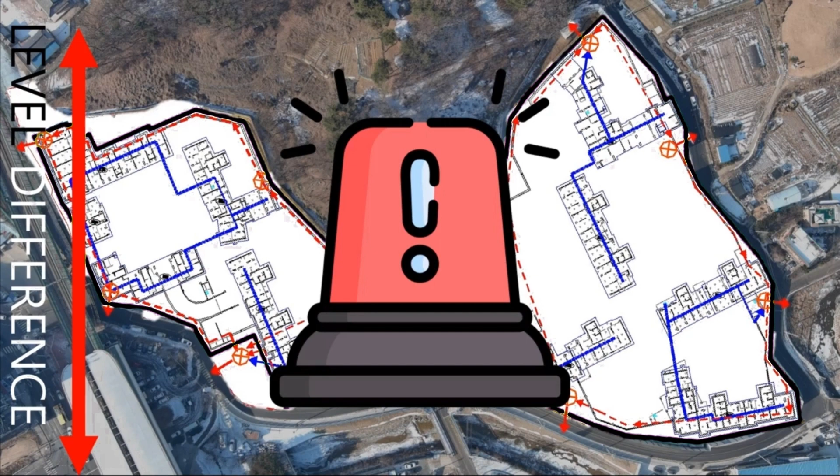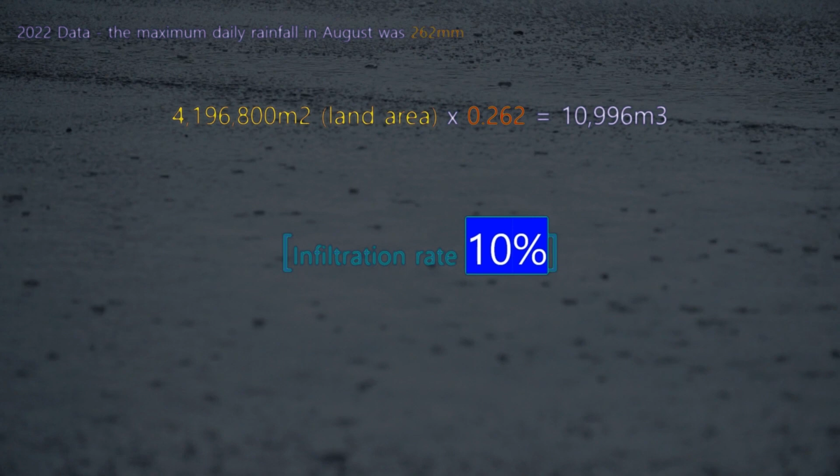To prevent this from happening, Hanyang Construction planned the rainwater treatment based on the maximum daily rainfall amount in Namyangju City, where our site is located. Based on last year's data, the maximum daily rainfall in August was 262 mm. For our site, the rainfall amount would be 10,996, which is the maximum daily rainfall in August multiplied with our land area, 4,196,800. The infiltration rate was estimated at around 10% based on the geological characteristics of the entire site, which means we need to handle approximately 9,896 of water per day.

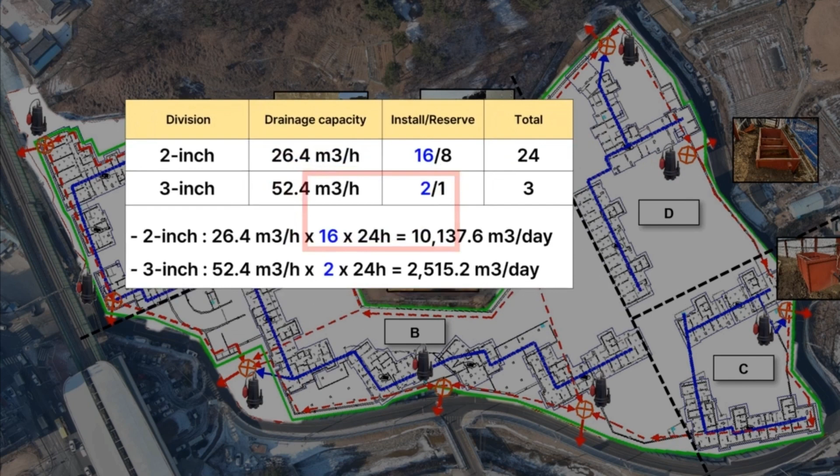To handle the excess water, Hanyang Construction installed 16 units of 2-inch pumps and 2 units of 3-inch pumps in each section. The 2-inch pumps can process 26.4 per hour of water, while the 3-inch pumps can process 52.4 per hour. Therefore, the daily processing capacity is 10,137 per day for the 2-inch pumps and 2,515 per day for the 3-inch pumps, totaling 12,650 per day. This means that the site can handle the excess water without any issues.

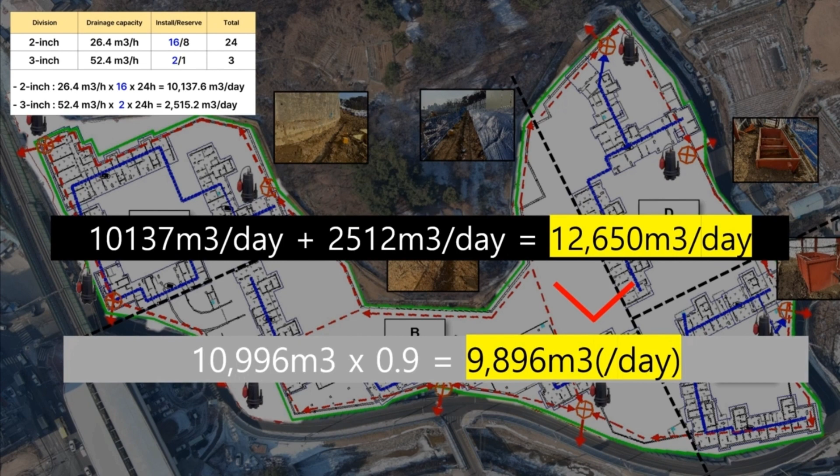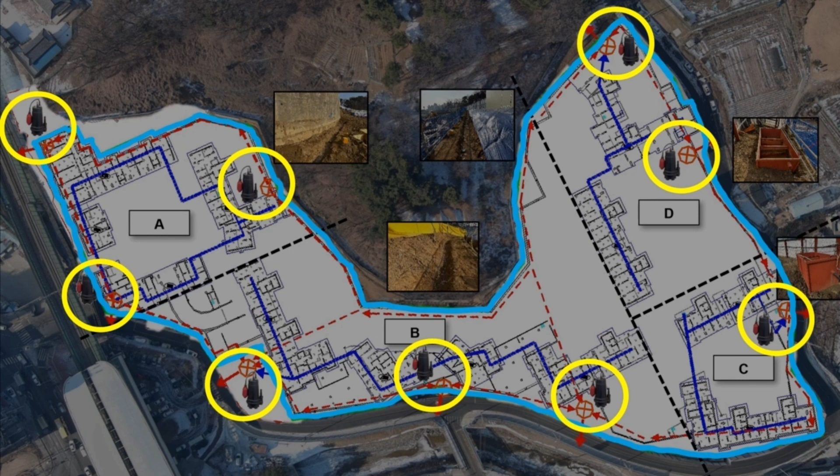In addition, we have installed drainage systems along the site boundary roads, including Sanmaru, and have prepared for the disposal of excess water by connecting 9 temporary grit chambers to the external drainage pipes of the road construction company in advance. This part has already been completed for water treatment on our site. Moving forward, we need to figure out how to handle the additional issues where excess water may occur during construction.

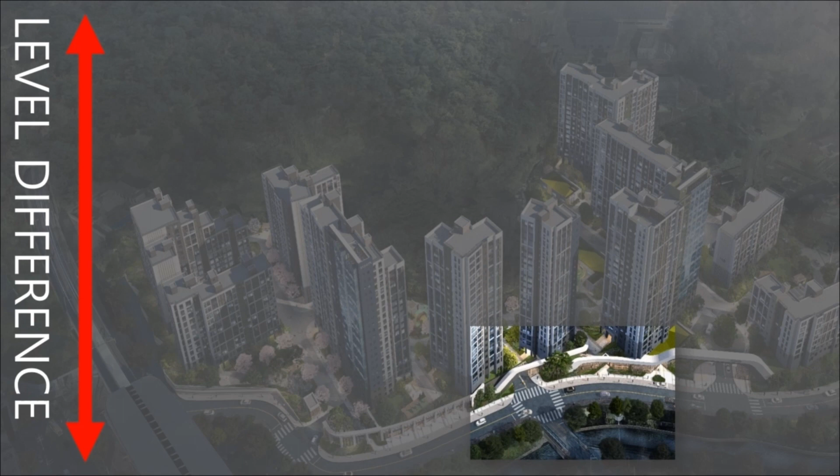Firstly, Hanyang Sujain Riverine is situated on a sloping terrain. As a result, there is a greater risk of rainwater flowing into the front of the first floor shops than in other areas. The initial design plan did not include measures to prevent rainwater from entering the front of the shops. Therefore, there was a risk of rainwater infiltrating the shops if the nearby river overflowed during heavy rain.

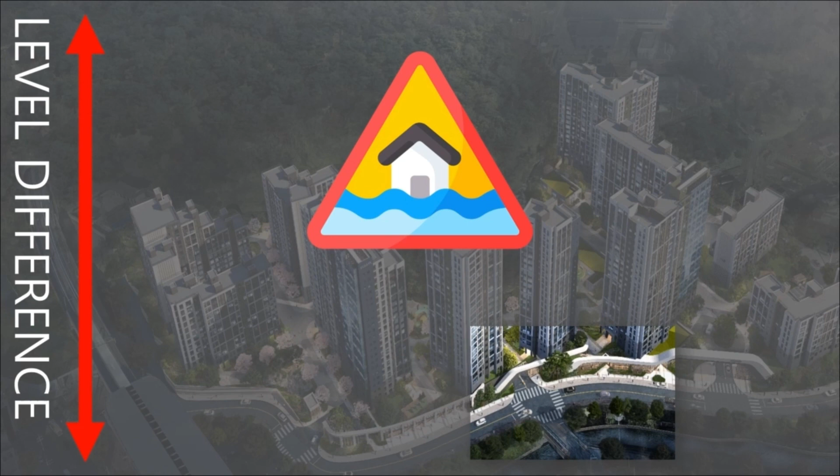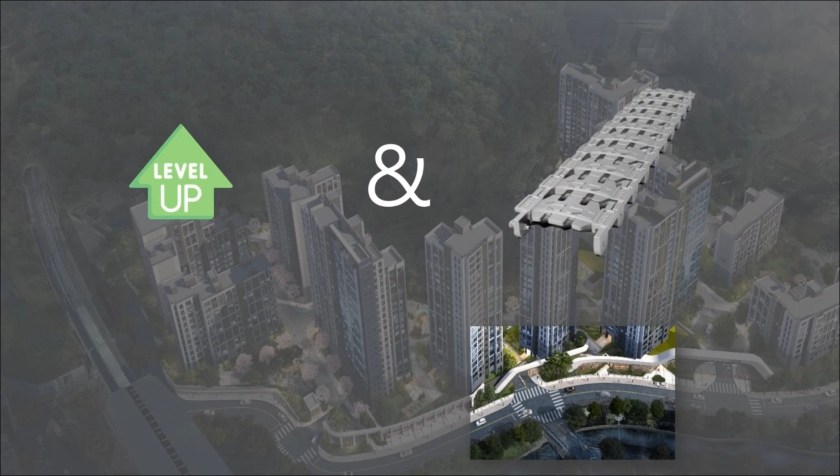To solve this issue, we modified the design by raising the level of the shop floors and creating a slight slope towards the road, preventing rainwater from entering. Additionally, we added a trench to serve as a pathway for rainwater to be discharged at the entrance of the shops. Moving on to the underground parking lot, as mentioned earlier, there is an expected increase in precipitation during the summer of 2023 compared to previous years.

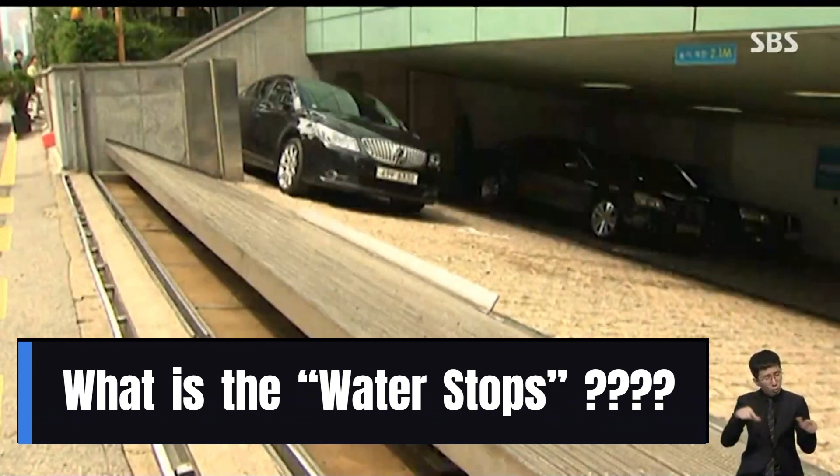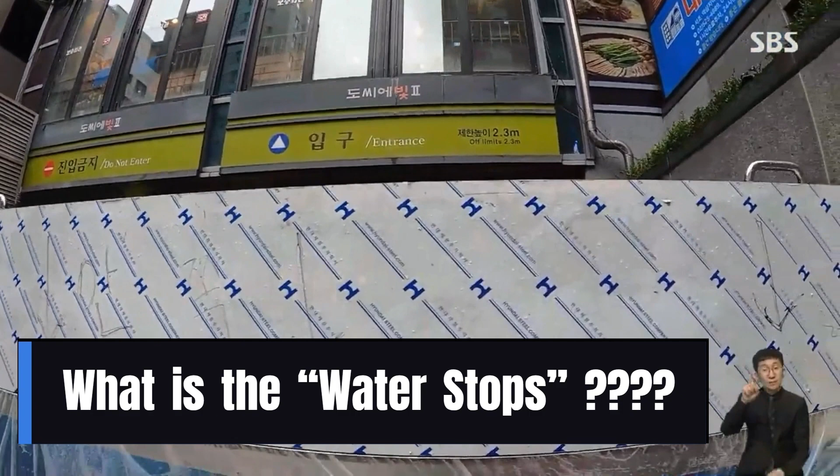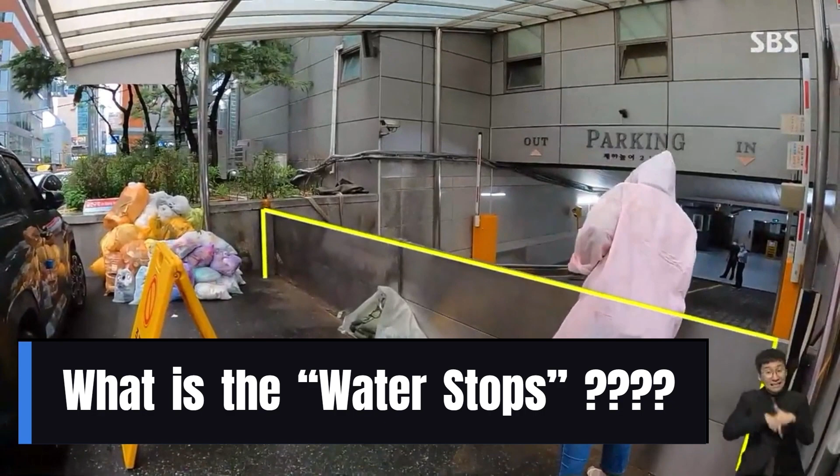According to SBS News, the demand for water stop values has increased more than tenfold due to the increase in flood-prone areas. The water stops are water blocking facilities installed in the entrance of the underground floors and the first floor of a building to prevent flooding damage from local heavy rain and other similar events. Flooding damage poses a significant risk to apartments with underground parking lots, especially those like Hanyang-Sujain River Pine, whose parking lots are up to the second basement level. Therefore, we must always be prepared to prevent damage from excessive water.

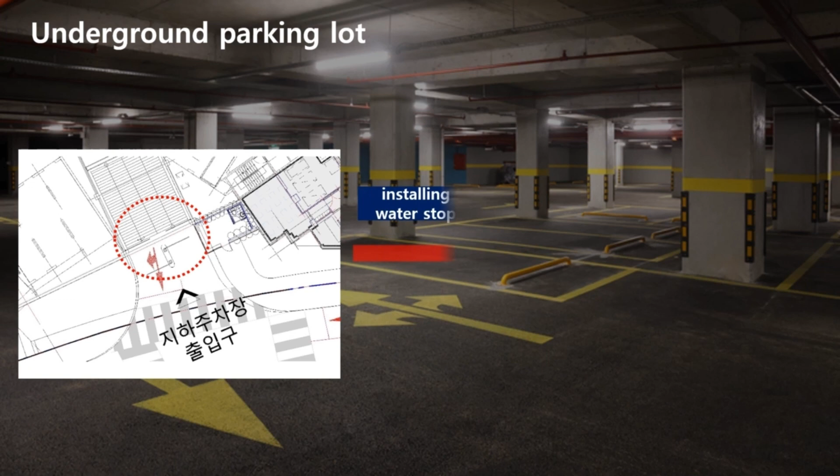Upon reviewing the design of the underground parking lot, we found a flat ramp that connects the ground entrance to the underground first floor and faces the river and external road. By installing a water stop at this entrance, we can prevent damage from excessive water and prevent flooding in the apartment.

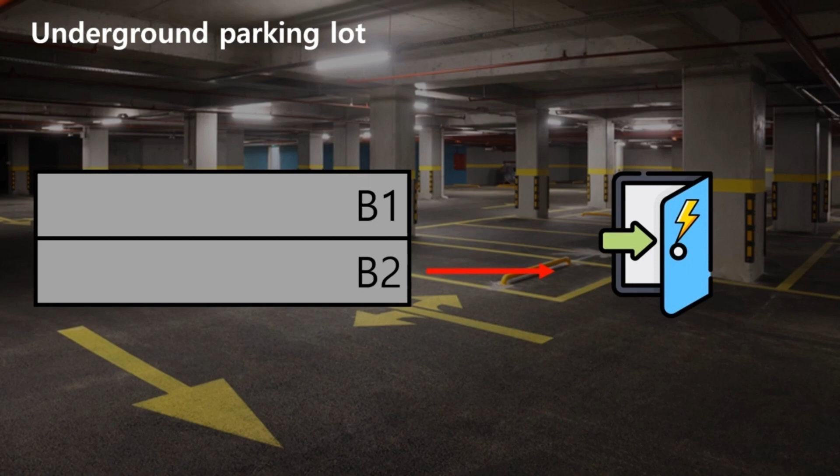In addition, there is an entrance to the electrical room located on the second basement level. If rainwater enters the electrical room as shown in the pictures, it can cause a power supply issue to the units and even lead to serious electrical shock.

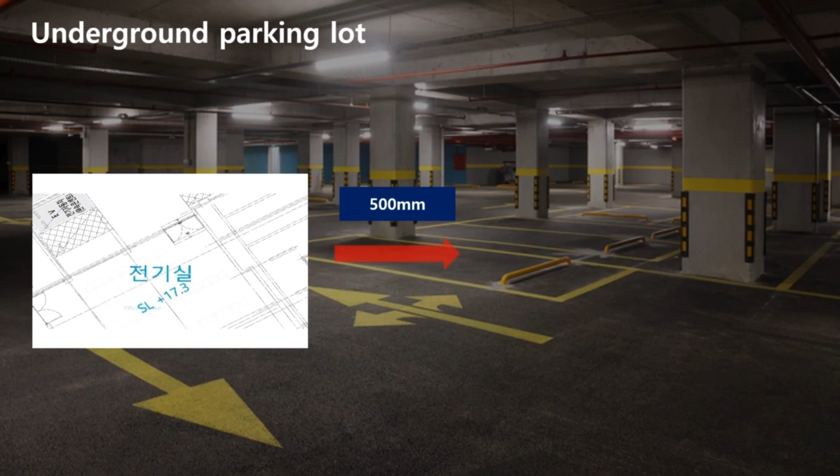To prevent such accidents, the framework raised spot of the entrance to the electrical room in the Hanyang-Sujain River Pine apartment was designed to be 500 mm or more above ground level. While it may not be able to completely prevent flooding from a large amount of rain, it is expected to provide some level of protection.

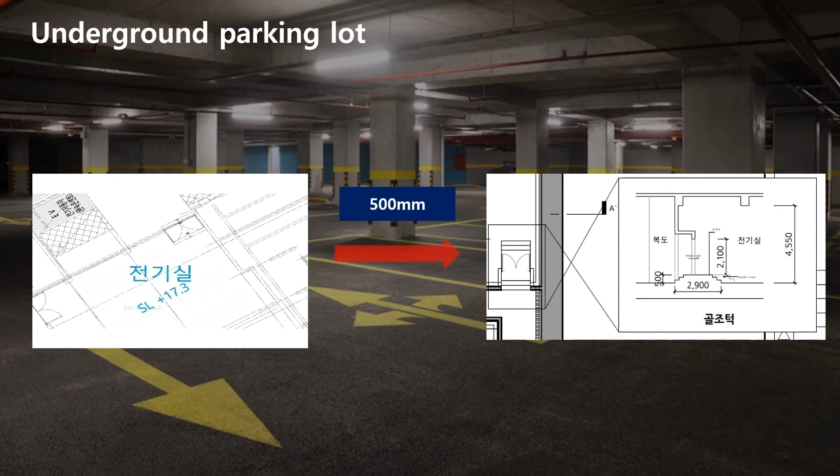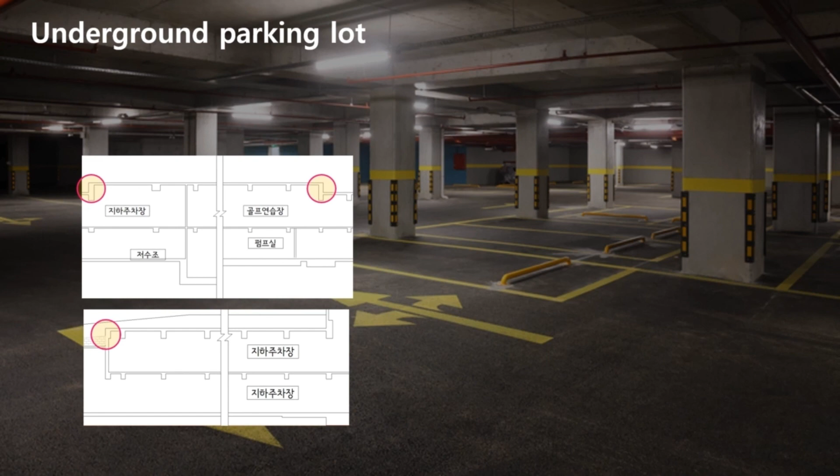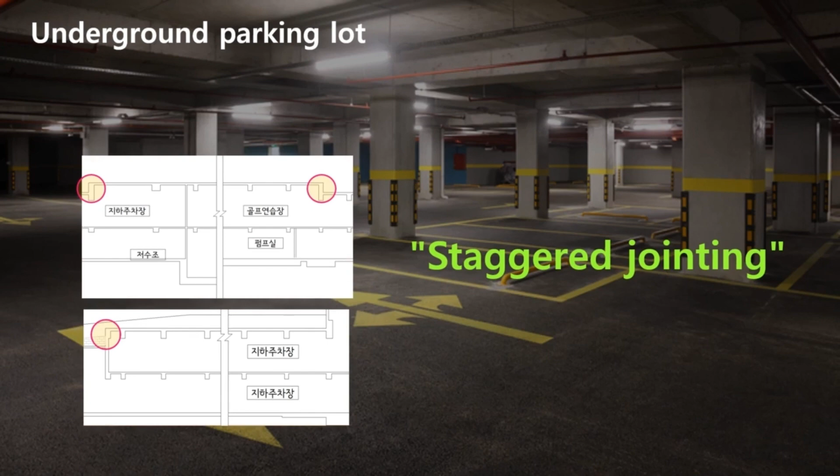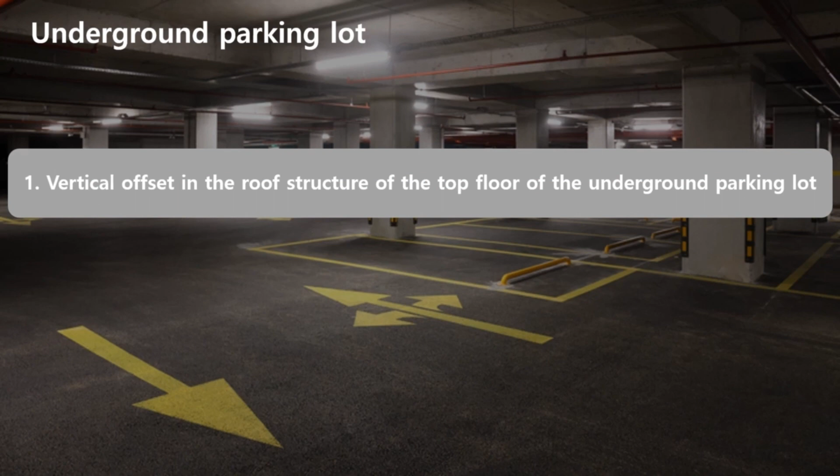That's not all. Let's take a look at the structure of the top floor of the underground parking lot, not the entrance. As you can see, there is a vertical offset in the roof structure of the top floor of the underground parking lot. Here, we need to understand the concept of staggered jointing. Staggered jointing means breaking and constructing the structure in sections. There are several conditions that require staggered jointing, one of which is the vertical offset in the roof structure of the top floor of the underground parking lot, which cannot be constructed all at once.

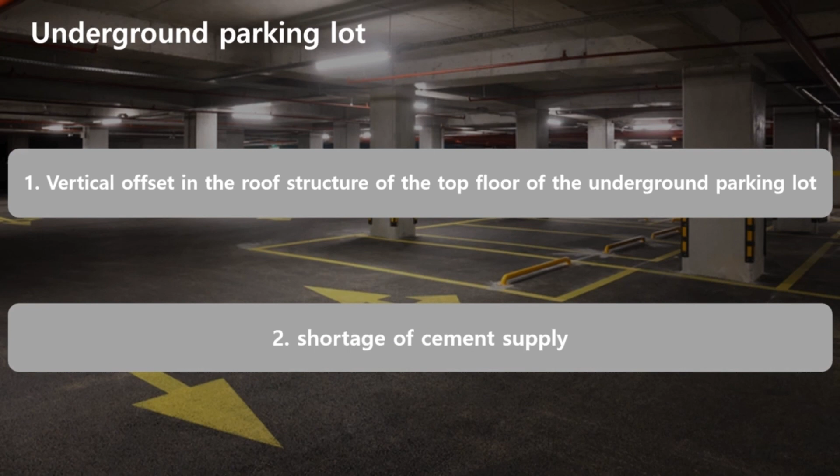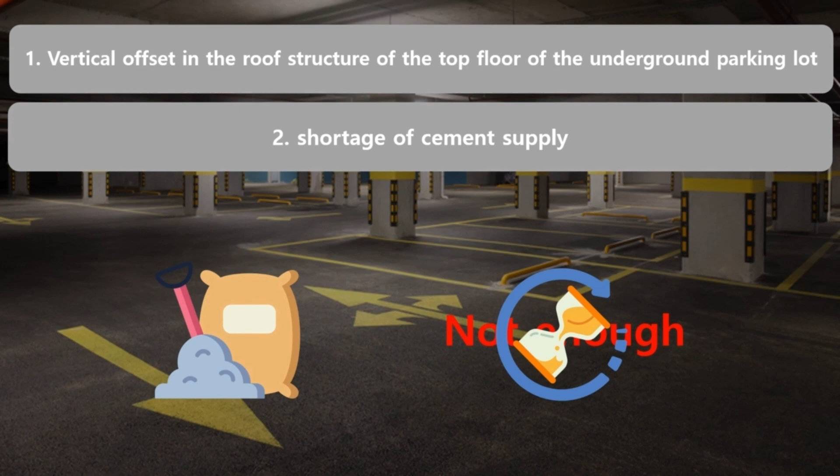Another condition can be found in the recent shortage of cement supply, as mentioned last week. On site, there is not enough cement supply, so the construction process that should be completed in one day is being carried out over several days. Cement is a material used to make concrete, so this also leads to a limit in the amount of concrete that can be used in the construction process.

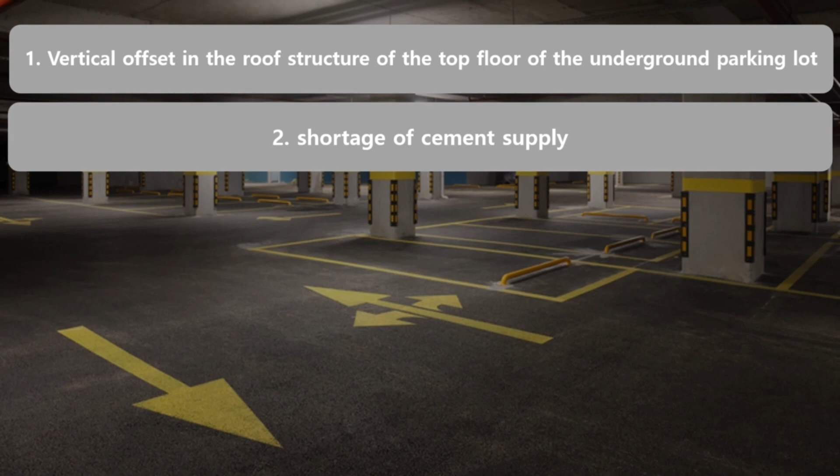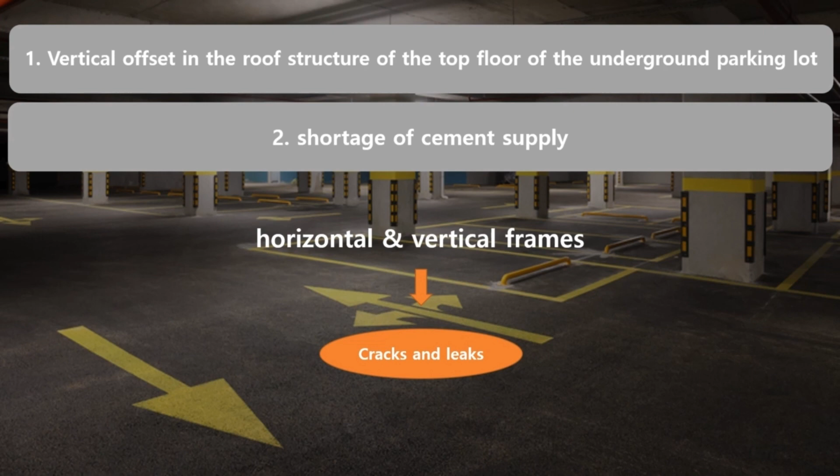Due to these reasons, the process of staggered jointing is necessary during the construction of several concrete structures, especially when there are separate horizontal and vertical frames as in our site. Cracks and leaks occur at the joints between these frames. To prevent such leaks, we installed waterproof raised spots on the vertical parts. However, there is an important point to keep in mind during the installation process of the waterproof raised spot.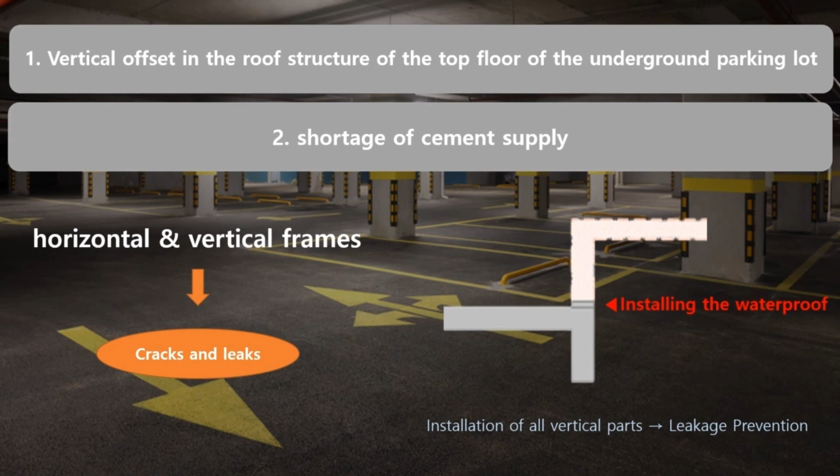If concrete is first installed, and the waterproof raised spots are installed separately, the purpose of installing the waterproof raised spot is lost due to the cracks that occur between the 2 concrete structures that were installed at different times, resulting in a higher risk of leakage. Therefore, we proceeded with the process of installing the waterproof raised spots by integrating the vertical parts.

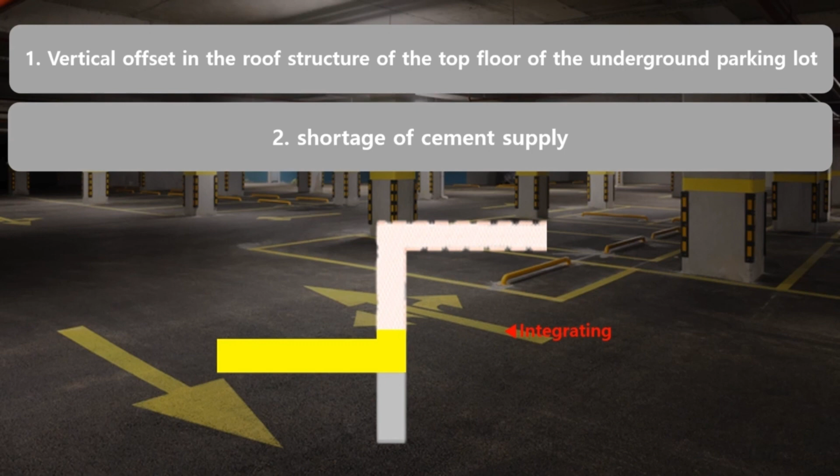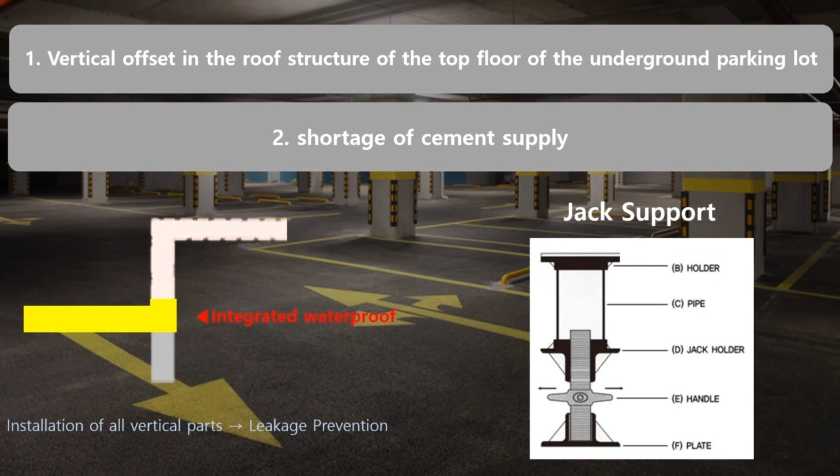Over time, the integrity of the concrete may deteriorate, leading to the possibility of joint formation. To prevent this, we used jack supports on our site. Jack supports are used to support the substructure of underground parking lots or large decks under heavy loads. They are typically installed at appropriate points on beams or slabs to prevent deformation or collapse caused by design loads or cracks that occur over time. At our site, we installed jack supports after PSC installation to prevent the occurrence of potential cracks.

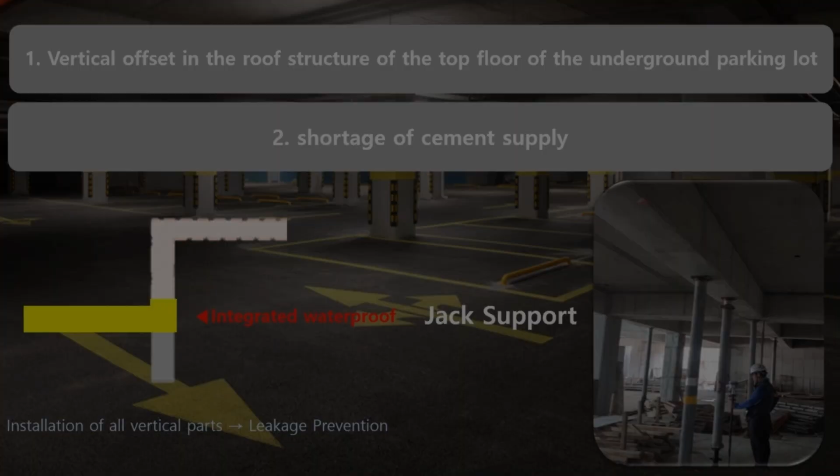So this week, we looked at the handling and preventive measures applied to our site. Next week, we will examine the overall construction process and the considerations within it.